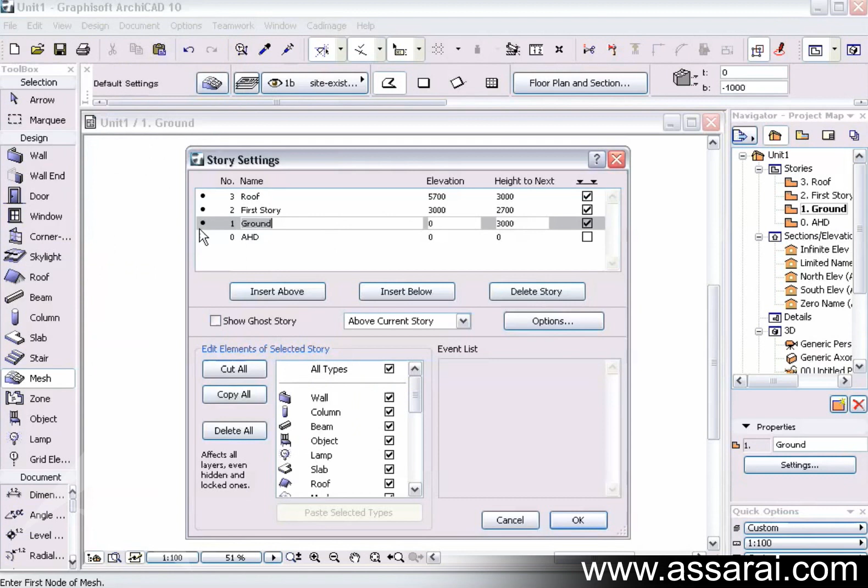To help define our workspace, Archicad works in stories. To help explain this, if I go Control 7 or go to Design, Story Settings, our Story Settings palette opens up. Now, rather than having a complicated system of layers and layer combinations, which other programs might do, Archicad uses a real virtual building methodology where you build on each level and build your building up by using these stories.

Over here we've got an AHD level, which is at the moment 0 to 0, and then we have a ground level, just like you would on a building site, your first story and roof. These stories can be changed at any time, and now can also be adjusted from the section elevation window. We can also insert stories above and call it whatever we like, and that name will be displayed in the top left hand corner of the particular window that you're looking in, and will also be displayed in your navigator or in your project map.

So if I just call this upper roof, and I'm just going to leave everything there, and I push OK, we can see that upper roof has straight away appeared in the navigator in the project map, but not in my view sets, because I haven't defined a view set that I want for a drawing yet. If I go back to Control 7, we can also insert a story below, and we can also delete stories.

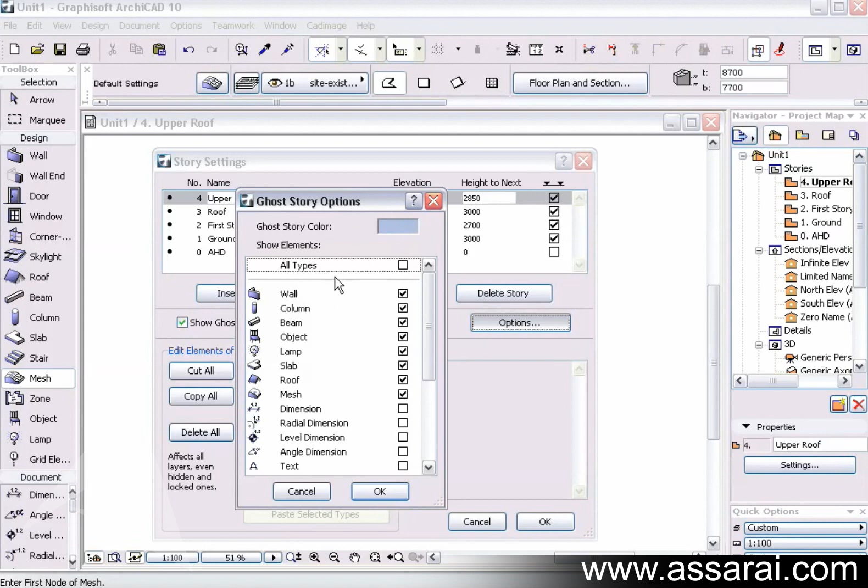We can also show ghost stories. I'm just going to check that at the moment. At the moment it's on above current story. I can also set it to below current story, and I can also put it to anywhere I like, in fact, in the project. Options, we can also change the ghost story color, and we can just say check all types, so everything on the floor plan is displayed as a ghost, or I can select individual items and just get those to be displayed by the ghost story.

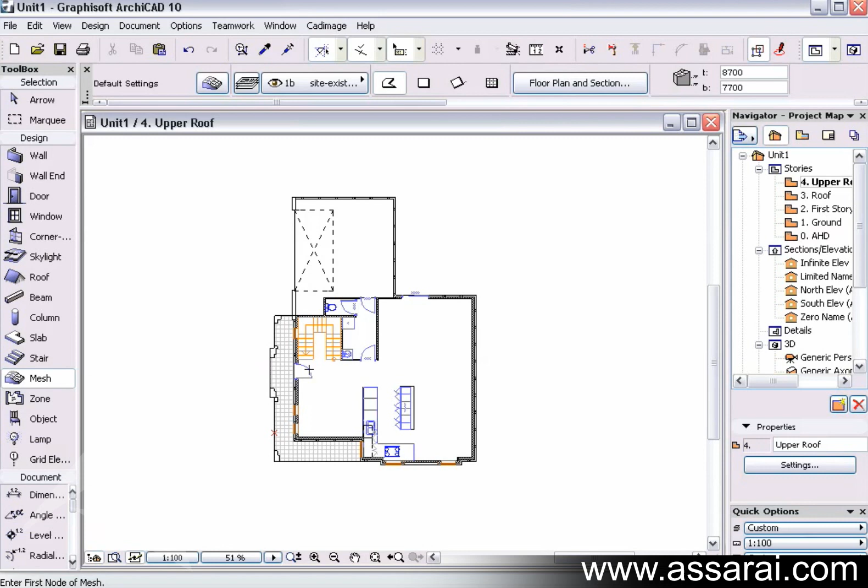Now, I can also cut and paste elements from stories. So for example, if I wanted to grab the walls from the ground floor, I could go copy all by just checking the walls or whatever I needed to grab from there, copy all, and then click on the upper roof where I want to paste it, and just press paste selected types. By pushing OK, you find now that that ground floor is over here, which won't make much sense in the 3D window, but I'm just trying to show that you can do it. So that's what I've done, and I can just grab all that and just delete it.

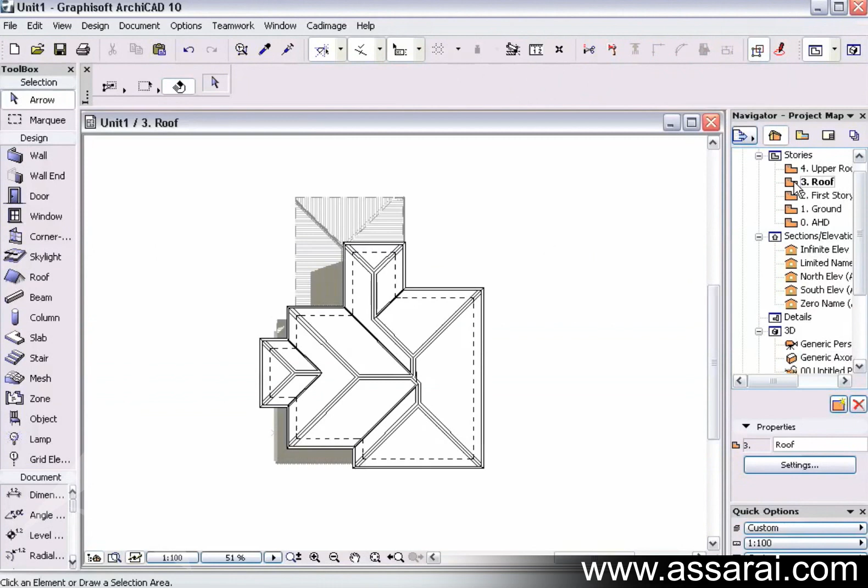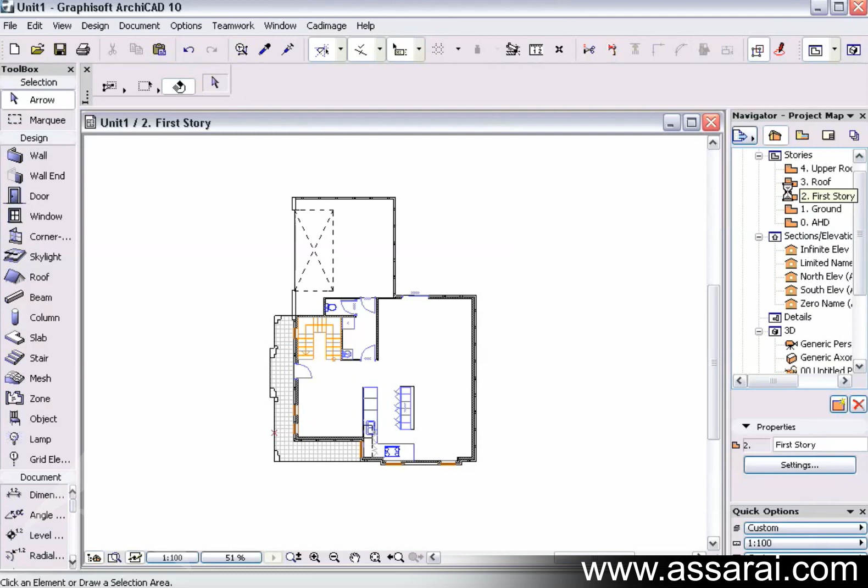Now I'm going to go back to the first story, and we can see the roof is actually ghosted against this first story. Now if I push Control 7 and I want to get the ghost story below the current story, I can push OK. Now the ghost story is from the ground floor. Now if I go up to this floor here, with the ghost story on, I can actually rest my mouse over the item, and in the info palette it's actually telling me it's on story 1 and it's ghosted, so I can't actually grab it.

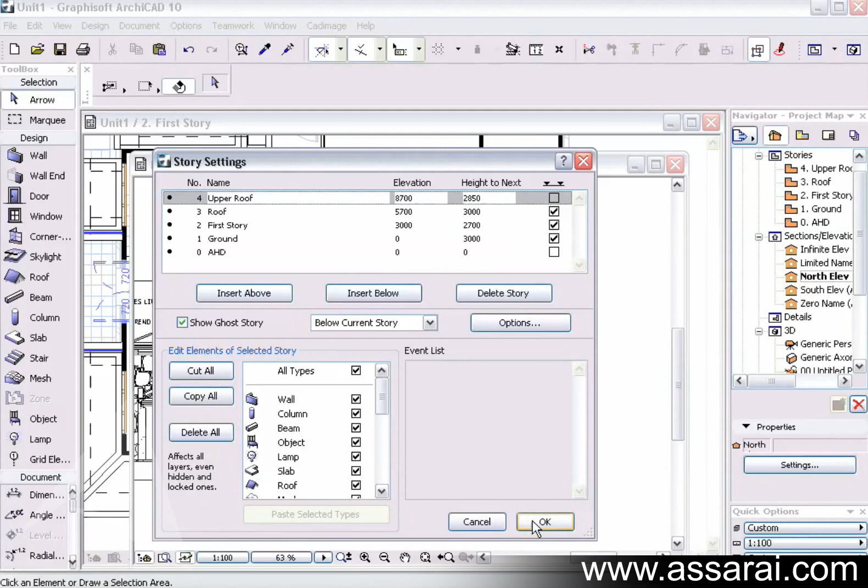So if I go to an elevation, here are my elevation markers and how they relate to this window here. If I want to deselect some and not show the marker, I can just push OK, and then that marker should disappear. The other thing I can also do is adjust the stories using the elevation markers. Just to illustrate this, I might go back to the story settings by going Control 7, and I might just insert a couple of extra stories.

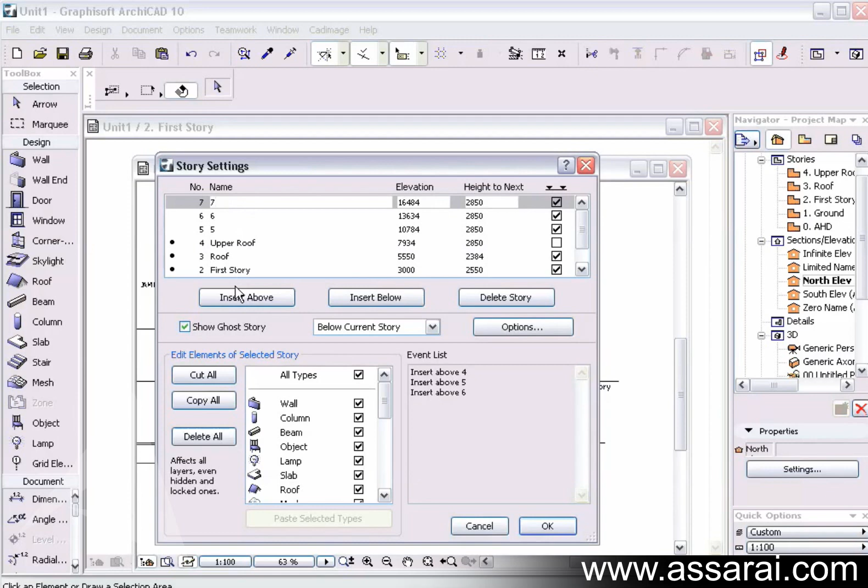Just might call this story 5. This one can be called 6. This one can be called 7. Now I want all the markers showing on the floor plan just to illustrate the point. So there's all my markers, and because I'm going to move the markers, I'm going to place a couple of hotspots so I don't lose the important points, because when we edit the levels from a section elevation window, it's not undoable. So it's a good idea to put a couple of hotspots there to help to move the story markers back to their original position.

Now if I rest my mouse above one of the section elevation height markers, a little tick will come up. If I right mouse click when that tick comes up, I can select edit story levels. Once I push edit story levels, we've got 4 options. We can edit only the chosen level, and to do that, once again we come along to this point here. When it becomes a tick, I can left mouse click and hold my mouse button down and move that up to anywhere I like. If I go Control Z, nothing happens. That's what I mean, it's not undoable. So I'm just going to move it back roughly to where I wanted.

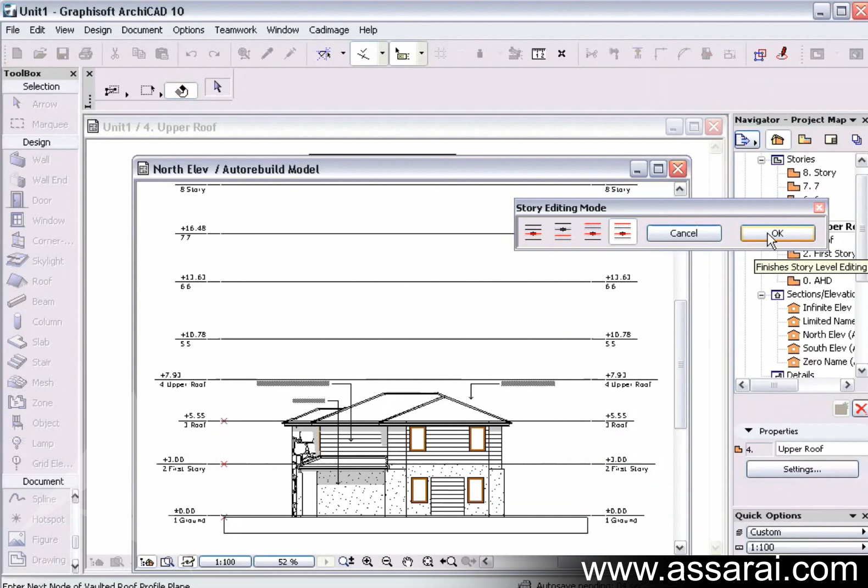And then the next option is edit all levels below the chosen level. So if I click that and select this elevation marker, we can see all of the markers below this node moving. Then edit all levels above the chosen level. So if I select this one and move it up, we can see just all the levels above moving. Move that back down, and then I can move them all at the same time. So there's our 4 options for our story editing, and I push OK, and that's a brief explanation of how stories work in ArchiCAD.